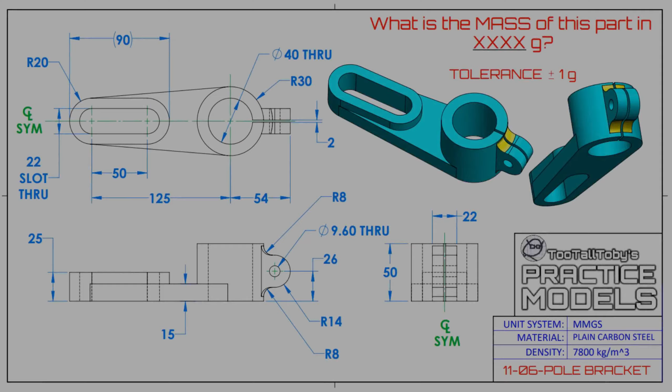This time around I'm going to try something different because I did not record my first attempt at solving this, which I did in about 5 minutes. I'm going to do a step-by-step solve instead. Hopefully that gives you a different perspective into how I approach some of these models.

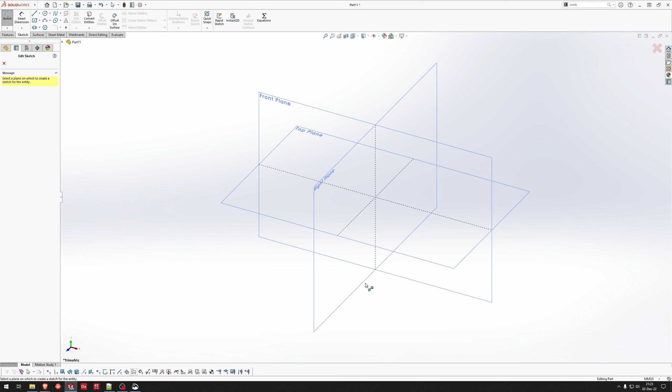So we're going to go ahead and start a millimeter part. I'm going to adjust my material properties so I don't forget them later. And then I'm going to go ahead and start a sketch on my top plane.

First thing I notice is that there's this circle on the right side where there's a bunch of dimensions coming from it that constrain the overall length. So that's where I want to place my origin.

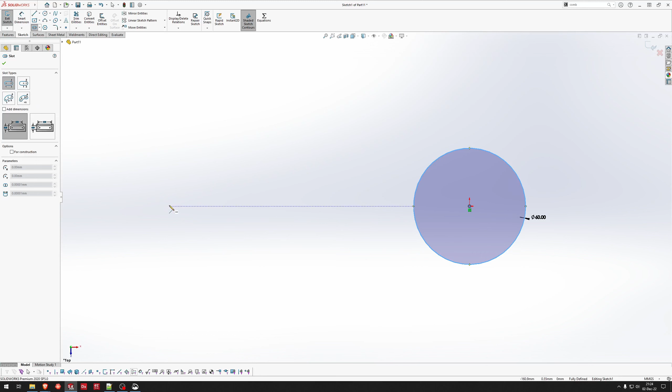I'm going to start with that external circle, and then I'm also going to create a slot over on the left side here. So I'm going to start with two bodies, actually in two separate sketches. Let's go ahead and extrude this circle up 50 millimeters.

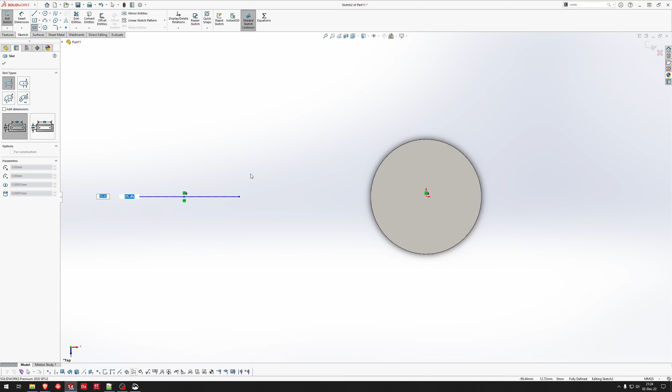Okay cool, go right back to our top plane, create another sketch. We're going to do our slot, so we'll pick up that coincident to origin relationship.

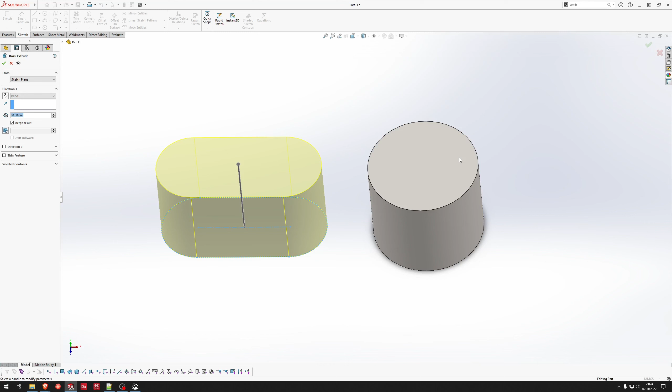We have a dimension here for the radius of the slot. We also have this dimension that constrains that position, so that's 125. Then we have our center point dimension of 50 millimeters. Done there - let's go ahead and extrude this up 25 millimeters and call that a day.

Again, back to our top plane, we're going to convert that arc and this arc. We're going to make those coincident there. I'm going to make those two tangent.

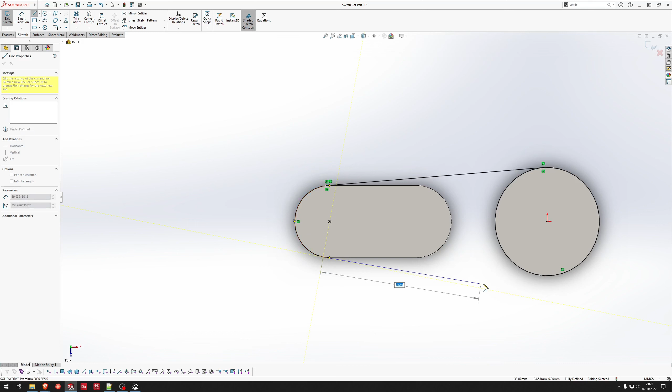And I'm going to do the exact same thing on this other side, so pick up the tangent relationship there. Bring that down, make those two tangent as well.

Now the tricky bit, which is trimming these two together. So I'm just going to very gently power trim over that and power trim over that, and then power trim that away. Now we have that shaded contour, which means we're good to go. Could also do a contour selection within the extrude feature itself.

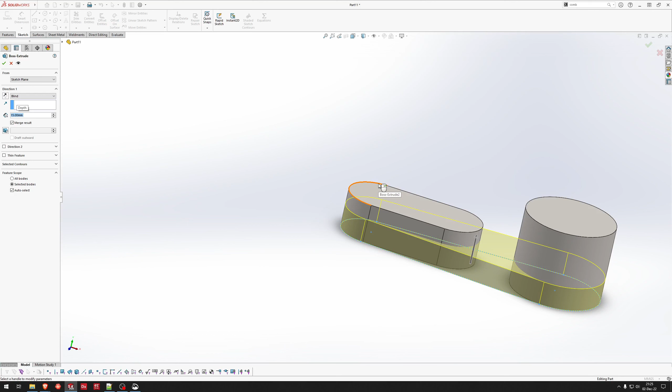So now we have our overall shape. We've extruded it up 15 millimeters. Now we can do our cuts.

The reason that I like to do some of the cuts last is because then I don't have to convert a bunch of these internal hole entities and forget about parts that I may extrude poking out through the inside of these walls. If I do the cuts last, I know the cuts are going to be clean all the way through.

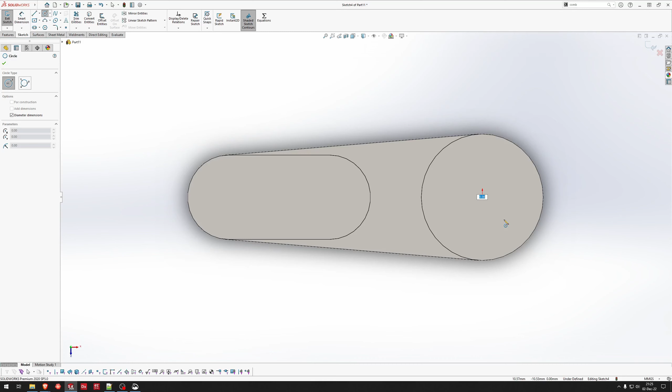So we'll start with a 40 millimeter circle. I'll go ahead and make two lines here between that circle and that circle, and there to there. Go ahead and convert this circle as well, and I'm going to trim away those two parts.

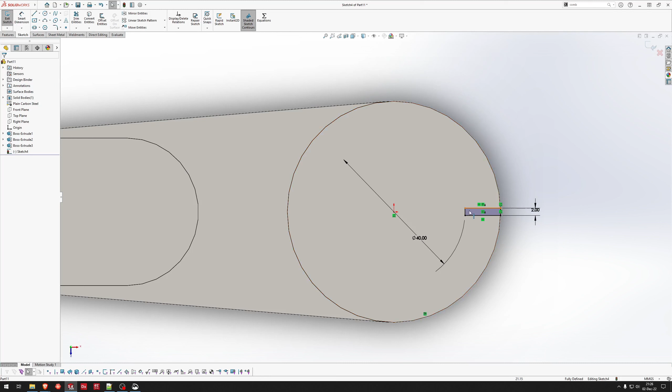Now I'm going to make this 2 millimeters, and I'm going to make these two equal length. That's just a geometric property - those two lines will be equal length, and that will make this centered around this point here.

Also, I actually didn't need to trim away everything there, so let me undo a little bit. I needed to just trim away that portion and that portion in the middle. And then again, going back in, adding this 2 millimeter dimension and making those two equal length.

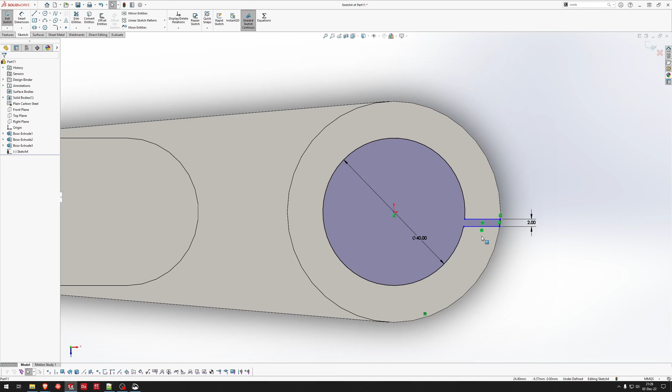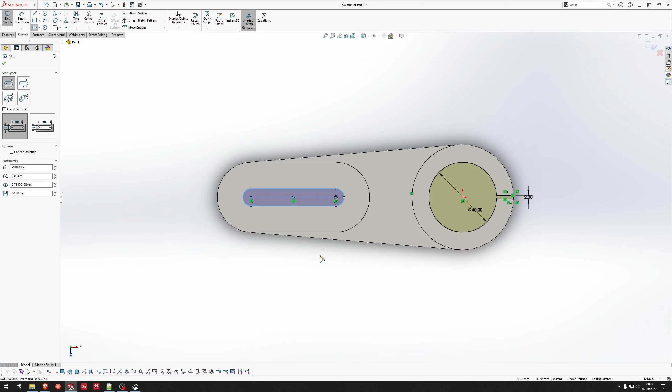Now this I can go ahead and extrude cut through all, right mouse button to finish that up. I could also have created the slot in this sketch as well since we're doing through all, so I'll go ahead and pick up those two relations and do that. This slot is dimensioned by its width, which is 22 millimeters, through all, and there we go.

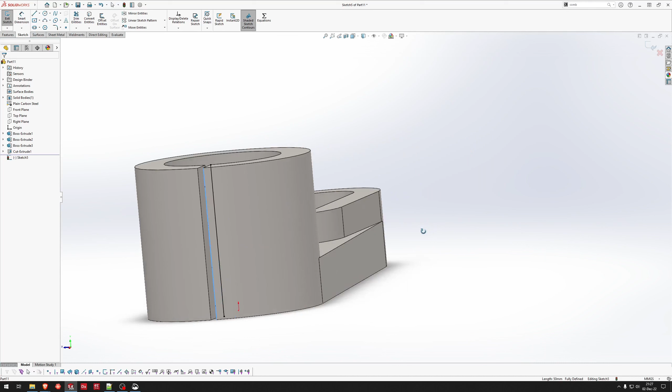Now we're going to go ahead and create a sketch on this inside plane since we already have that there. I'm going to convert this line there as well, so I'm not modeling off the outside edge and having an extra face to delete later, which I could do as well. I'm just going to pick up that inside line, then create a line, arc, and a line, and again trim away that bit and that.

Start a dimension, we're going to bring up 26 millimeters there. Now our overall width, holding shift to pick up that outside edge of the circle rather than the center point, 54 millimeters, and our radius here of 14 millimeters.

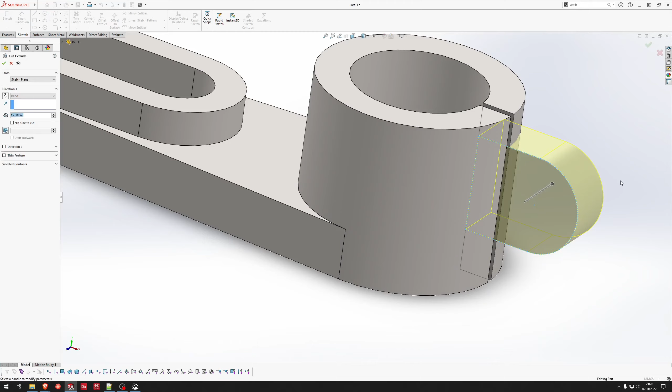Cool, we're going to go ahead and extrude this out. This is dimensioned a little weird, so it's 22 millimeters from the center, that's 22 divided by 2, and then also minus 1 because this center slot is 2 millimeters wide, so half of that is 1, so just a 10 millimeter boss extrude. Actually, let me make sure I do boss extrude, not cut extrude. There we go, 10 millimeters, and we're going to go opposite direction.

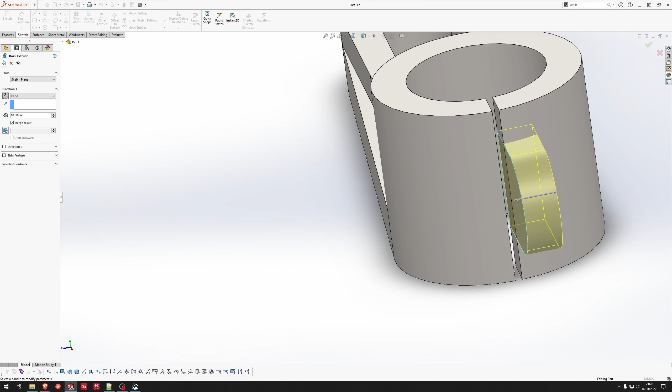Another thing I forgot to mention is there's a circular hole that goes all the way through, so let's go ahead and jump back in and add it. Instead of making a new cut extrude, we can just add it into the same sketch and it'll pick it up automatically. We'll mirror this over the front plane.

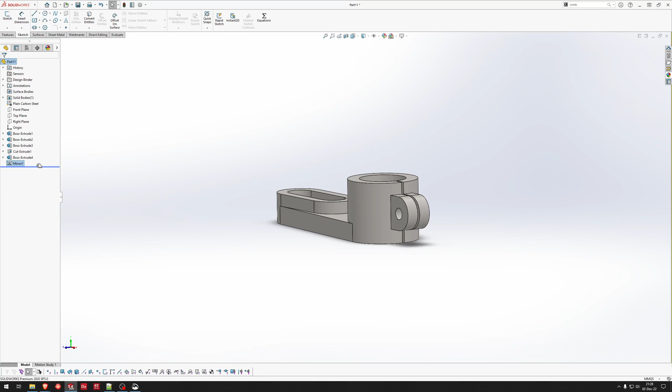Everything looks good. Actually, before we even mirror that, we can also do a fillet, but let's just go ahead and fillet from here. Let's see if any of these pick up - alright, we got one edge.

Could have just picked that up myself instead. Alright, and our radius is 8 millimeters. We're going to go ahead and hit OK and get our mass properties - 1,300 grams, that's exactly what it should be.

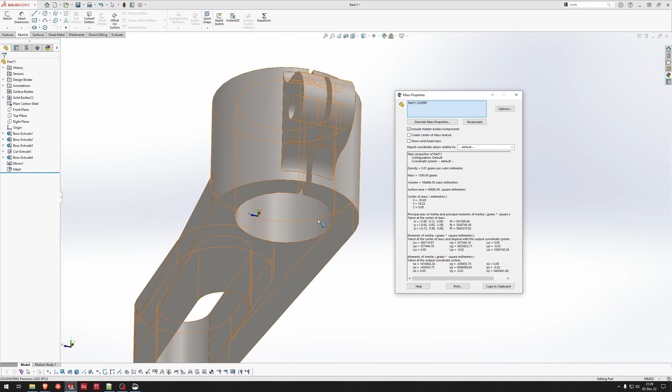Hopefully you guys learned something from that approach rather than watching me speed through it and just give a couple of tips. But that's how I would model this part, which is the 11-06 pole bracket, which we're going to save in the correct folder of SolidWorks practice. Alrighty, so that's that model all done.